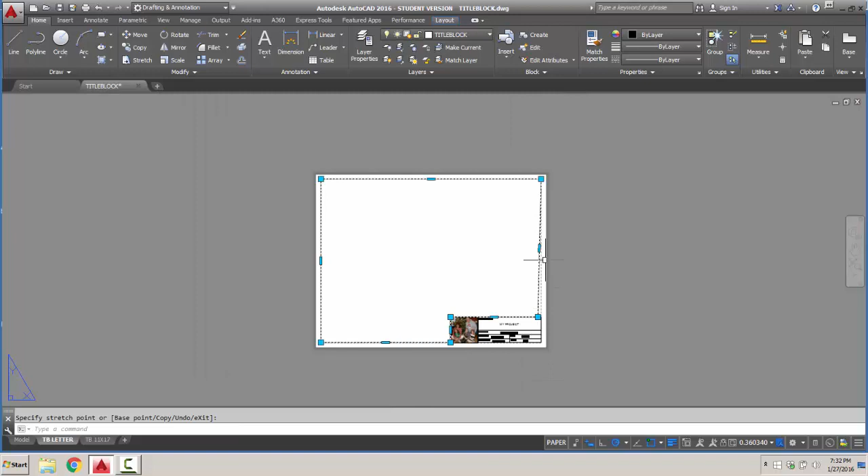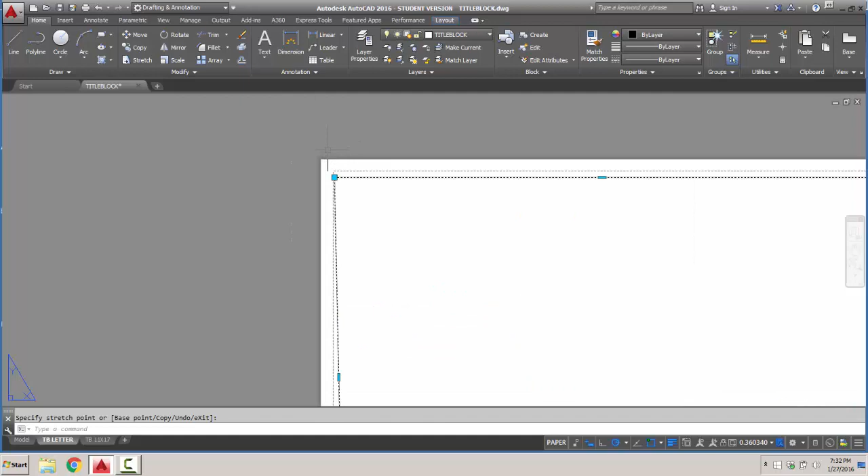What I want to do is actually just change this view window just a little bit, bringing it in a little from the border so it doesn't bleed off too much. You can just pull these handles down. You'll notice when I pull this one down, it tells me when I'm level. And we'll pull this one in, and pull it up from the bottom just a little bit.

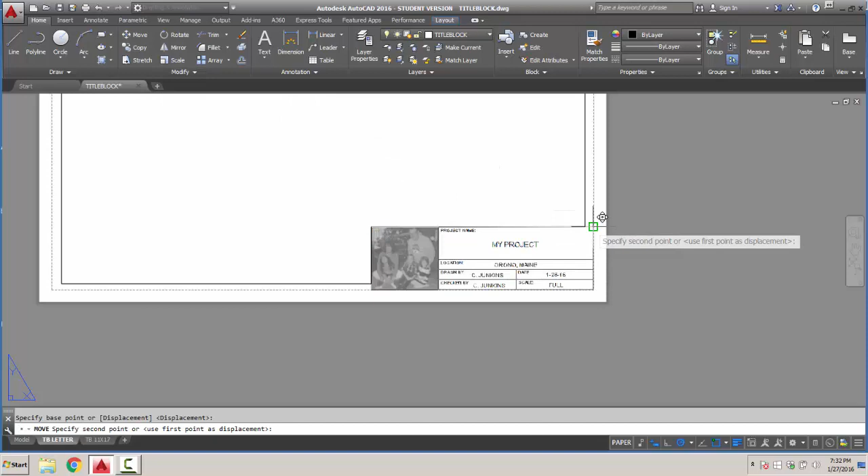Hit escape. I'm going to take my title block and move it, using the move tool. Just grab it by this top corner, bring it here, and then we'll bring it up to here. And we can just grab our handles and reposition it around, just making sure our border will fit.

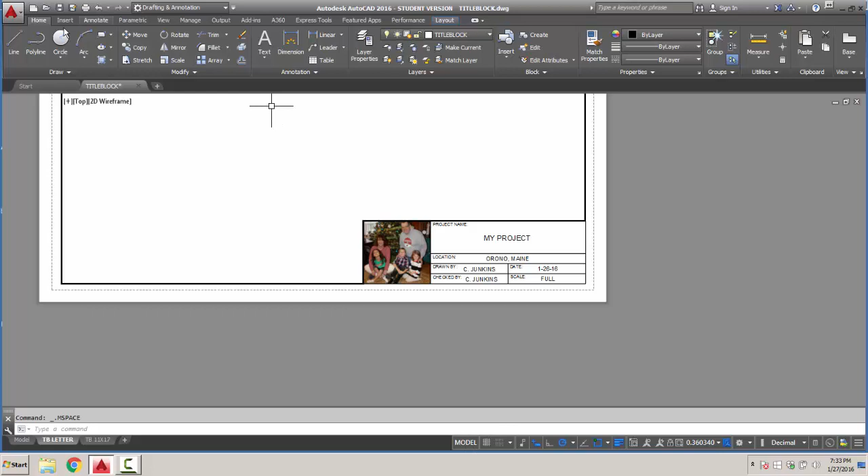Now I'm going to go to the model mode, and I just want to take my line tool and trace a line around here. Actually, I think I may have to do this in paper mode, sorry. There we go. Okay, so that'll give us a border.

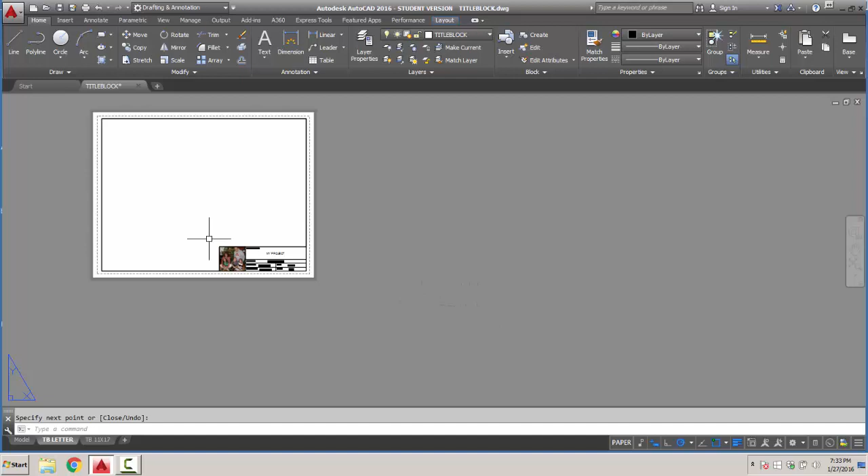Do a file, save, and then we'll close this out. And we'll open up our good old-fashioned plate.

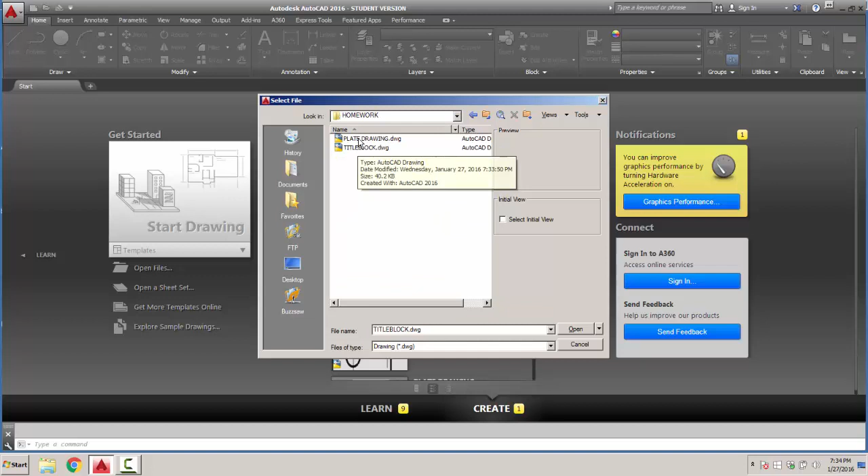I'm going to use my, I think it's in my desktop home directory, homework, plate drawing. And I should probably, let me just close that. I'm going to bring up another drawing from our lab class so it shows up better what I'm trying to show you.

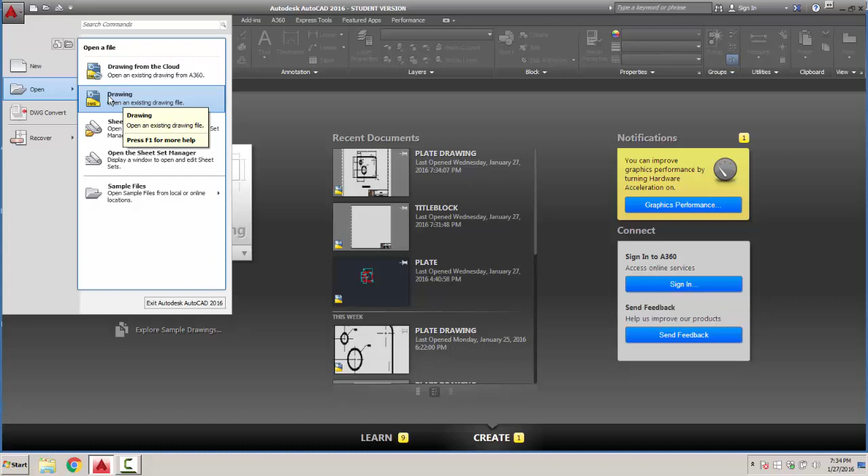So I'll go into lab 1, I'll bring in homework, there's our plate drawing. That one looks a little better. I'm just going to do a file, save as, and put this into my home directory so it doesn't mess anything up for next week. And I'll just overwrite this one. Yes.

Okay, so here's what we're going to do. I'm going to bring in a new tab. Down here at the bottom, I'm going to take Layout 2, right click, and delete it. And I'm going to right click on Layout 1 and say From Template.

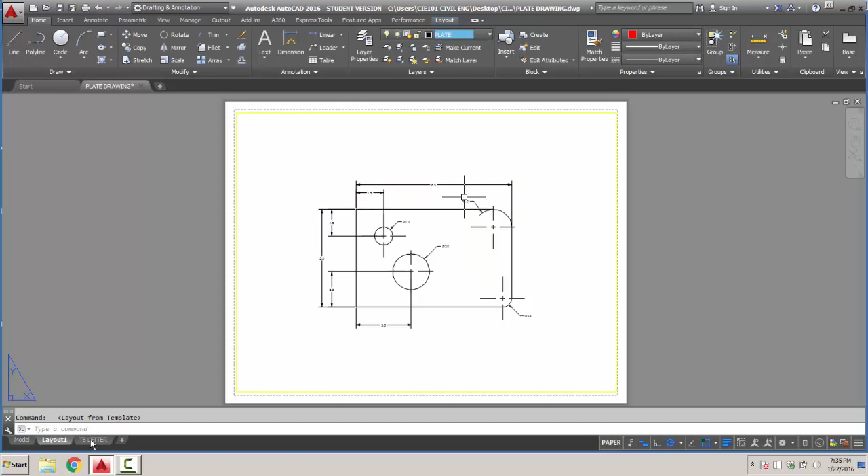I'm going to bring in my title block, make sure it's the one from home. Yep, title block, open. And I want the one that says letter. Just say OK. What you'll notice now is I have a letter title block down here. If I just right click on this, I can see it. If I double click in here, it brings it to the middle. Go to model, double click, and there's my model.

What we're going to do now is drop this down to half scale. Go to model, 1 to 2.

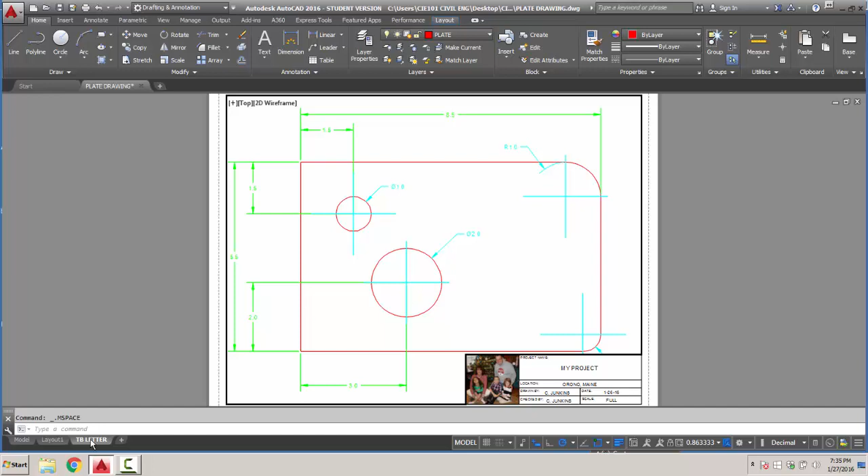And while we're in the model, we'll go ahead and set our line weights for our output. So you're going to go to your layer properties.

We're going to say on our center mark, pull this down. We want it to be a center line. I may have to change that, but we want it to be dark gray. Okay, and see those changed.

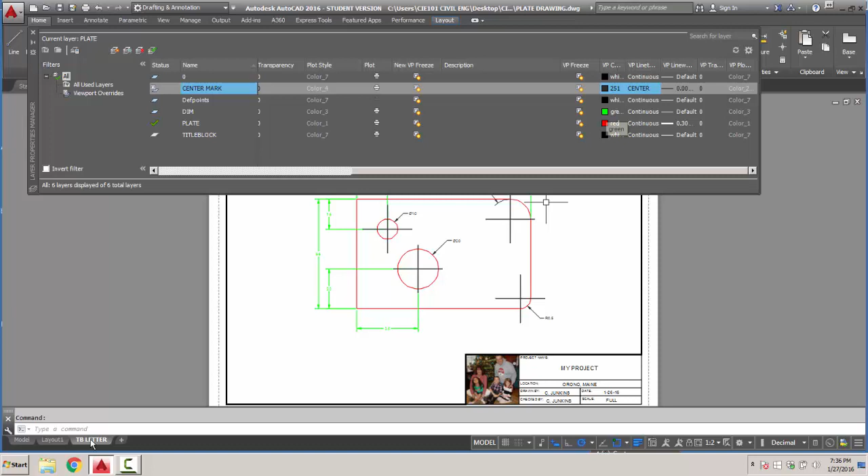And the green we want to be black, and the red we want to be black. My line weight I want to print out at 0.5 millimeters. My dimensions I want to print out at 0.2 millimeters. My center marks are going to print out at 0.13 millimeters.

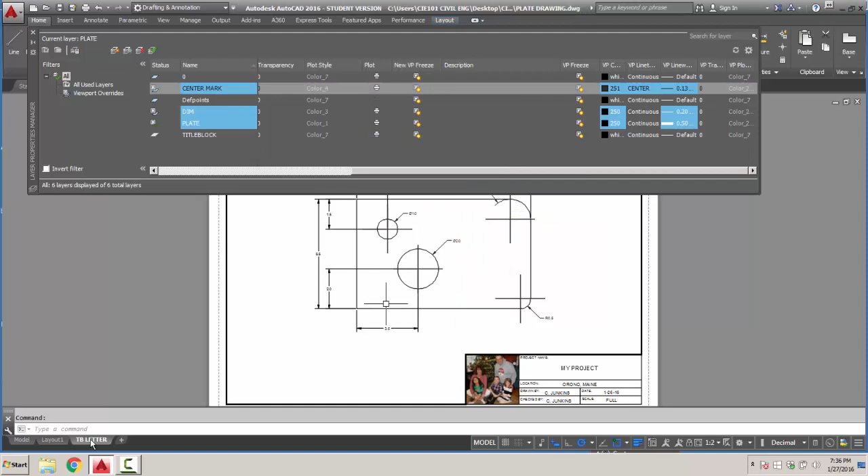And we'll close that out. I'm going to select each one of these. We're going to change it to center mark.

Huh. Still having trouble getting these lines to show up, so keep dropping the scale out of it. Let me just make sure I've got some things correct here on my model.

I'm going to type PSLT scale, should be set to 0, and LT scale is set to 1.

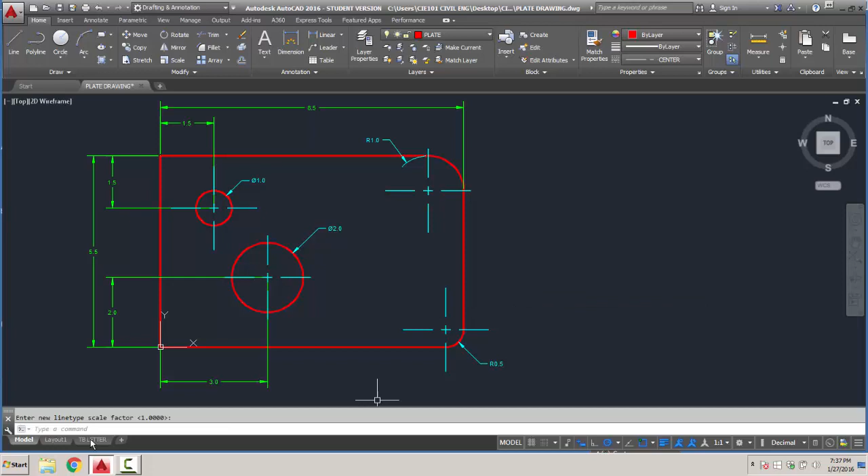Let's go back over here to our title block letter. Let me just see if I can change it to center. You know what I think is I've got duplicate center marks on here, that's what happened.

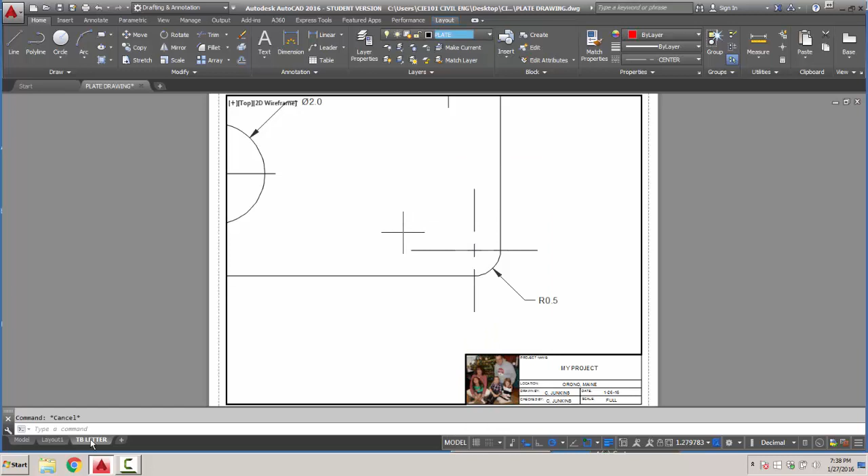That was... oops, don't want that one. There. That's what was causing the problem.

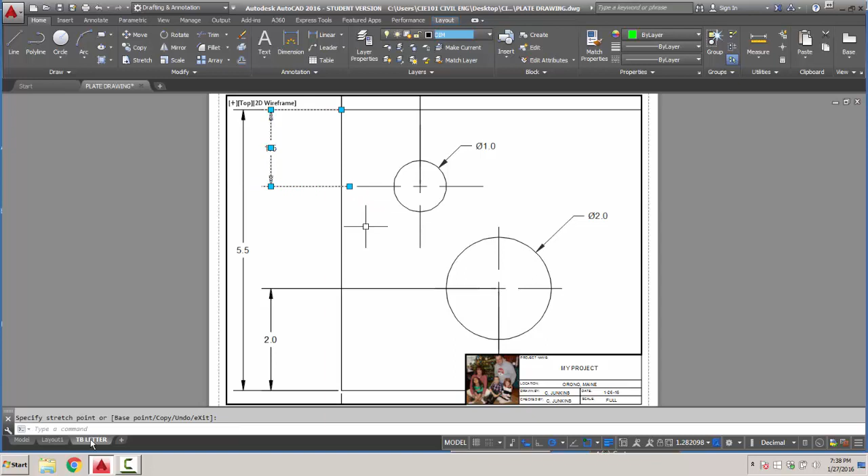Much better. And I'm going to grab these dimension lines. I'm just going to bring these out so they leave a gap, just to make it look better.

Hit escape, grab this one. I'm just pulling it off the center mark and pulling it up so it leaves that little gap. It just looks nicer if you can leave those out of the way. Not being too fancy about it, but good.

And these will kind of stay lined up anyway for you. Just gotta be careful with the mouse. Much better. Now let's change this to 1 to 2.

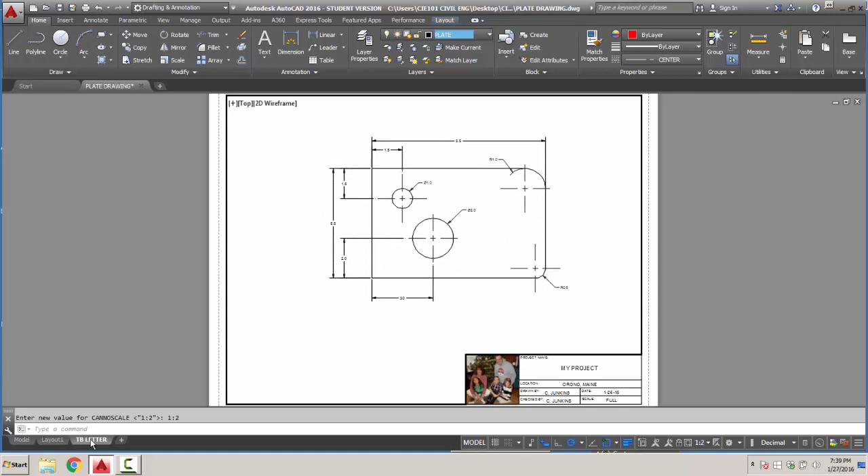Move it into place. We're going to go check our layer properties one more time. Bada bing, bada bing, looks good.

Close this out. Now we'll go to paper space, or paper mode. I'm going to double click on this title block. It's going to bring up...

So my project name is going to be, all caps, PLATE DRAWING. And we'll leave the location, drawn by, checked by, call it 127.

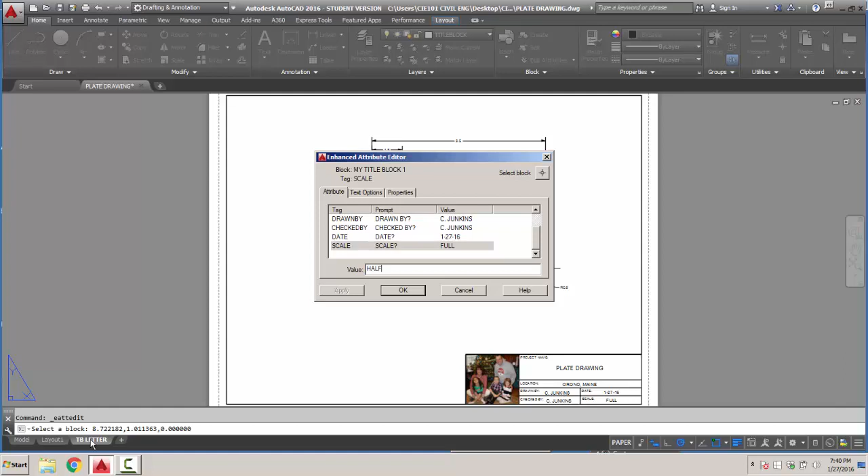And this is not full scale, it's going to be half scale. All right, so we can zoom in. There's what our line weights will look like. Got our image... oh, it's nasty.

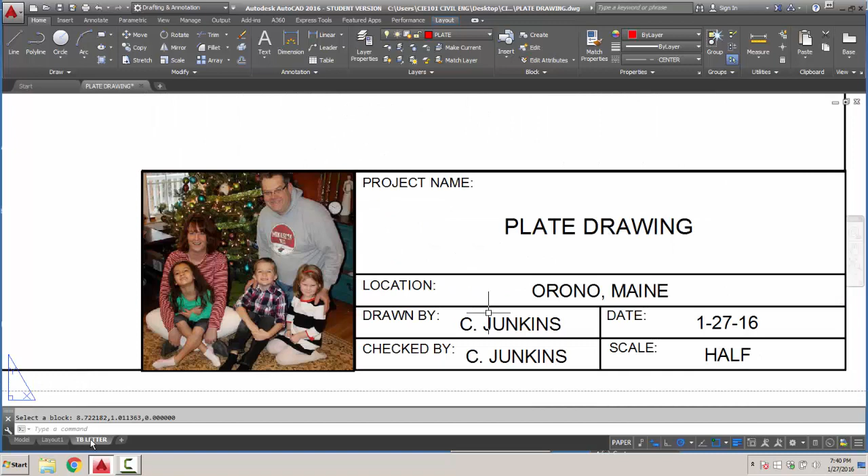Okay, so anyway, what we'll do now is right click down here in this tab, and we're going to say plot. Yes, we just want to plot a single sheet. We're going to change this to Adobe PDF.PC3, which I think everybody should have on their machines. Letter size, and I want to preview it.

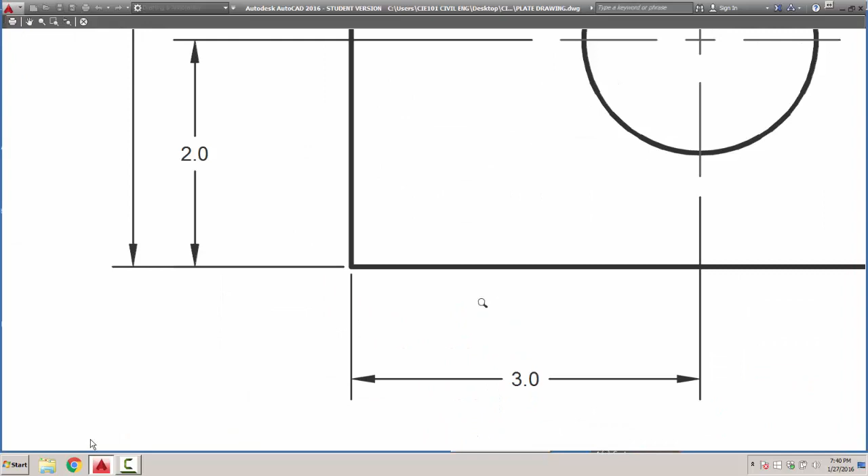There it is, and I can zoom in, see that my line weights look good. That all looks good down here. And maybe one final little touch here.

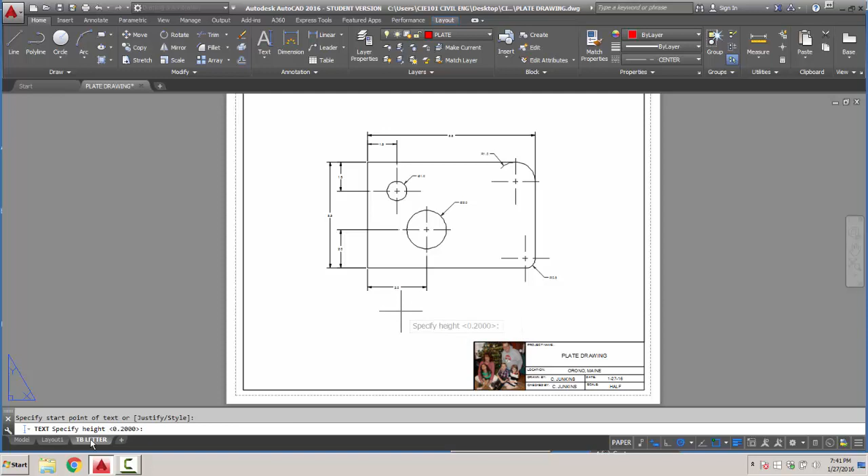I'm going to cancel this out. I'm just going to recenter this a little bit more, and we'll put some text on the bottom, just some single line text. Hit enter, enter again. I'm going to call it plate top view. Whoops, didn't mean to do that. Plate top view. Hit escape.

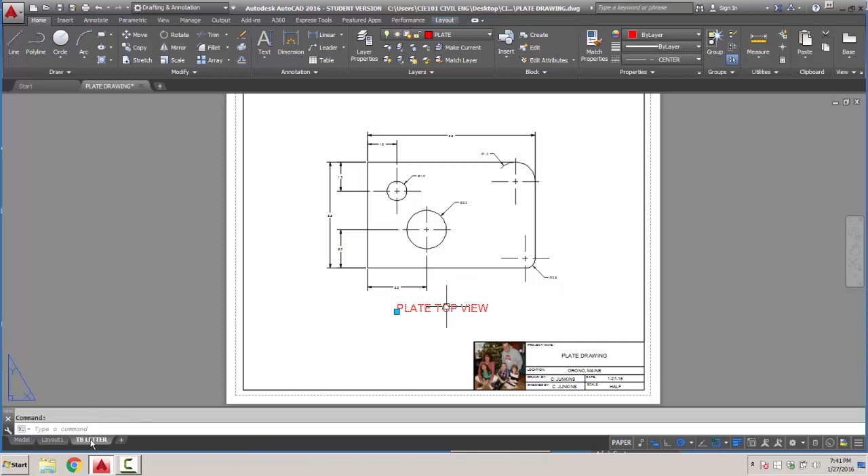Now I'm going to select this, right click and go to properties. I want this to be in the title block level, in black, by layer, and let's make it a little smaller, say 0.15. That looks a little more professional. And if we want to move it over to the center, looks a little better.

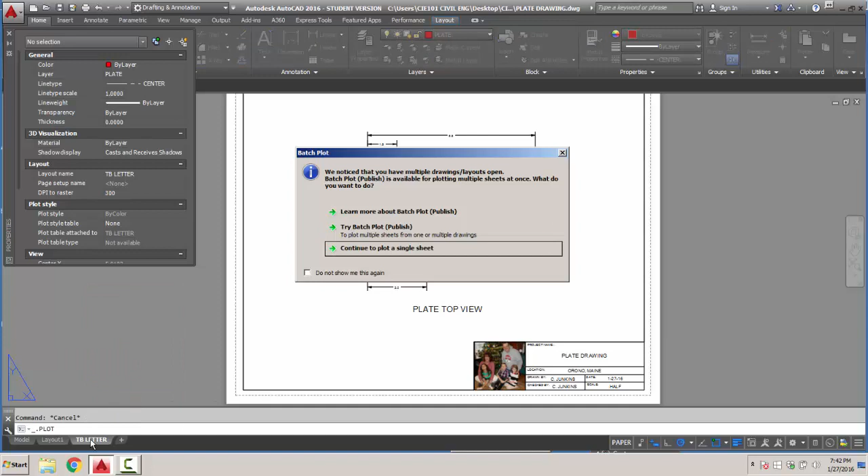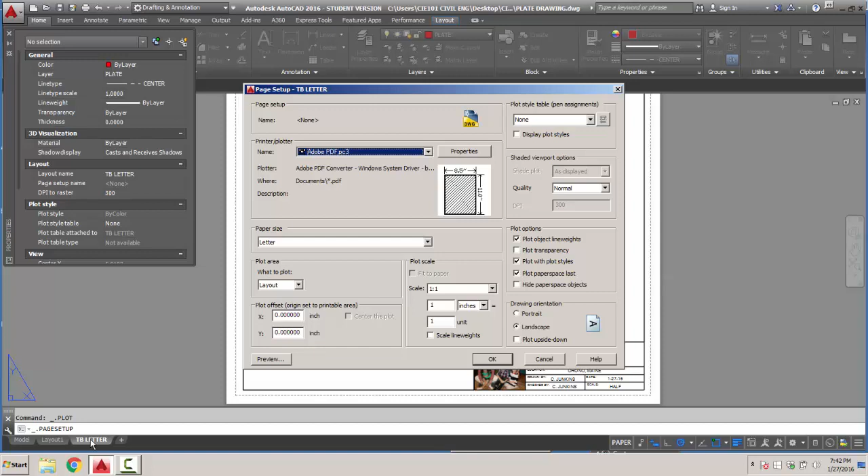And we'll right click, we'll say plot, continue, single sheet. We want to again set it up for Adobe PDF PC3. If we don't want to keep messing with that, you can come down here, right click, and say Page Setup Manager, Modify. You can always say whenever I'm in this page, I want it to print to Adobe PDF.pc3, no pen tables or anything. And transparency, we'll click that off. Okay, close. Now when we do a right click and a plot, it'll always come up to that.

We'll do a preview, look it over good, make sure everything is in proper shape, and we hit plot. It's going to ask us where we want to put it, and I'm going to put it in my CIE 101 home PDF folder that I created.

Call it assignment... let's call it plate proj C Junkins. Save. So now we can just do a file save here, just to make sure it's saved, close it out.

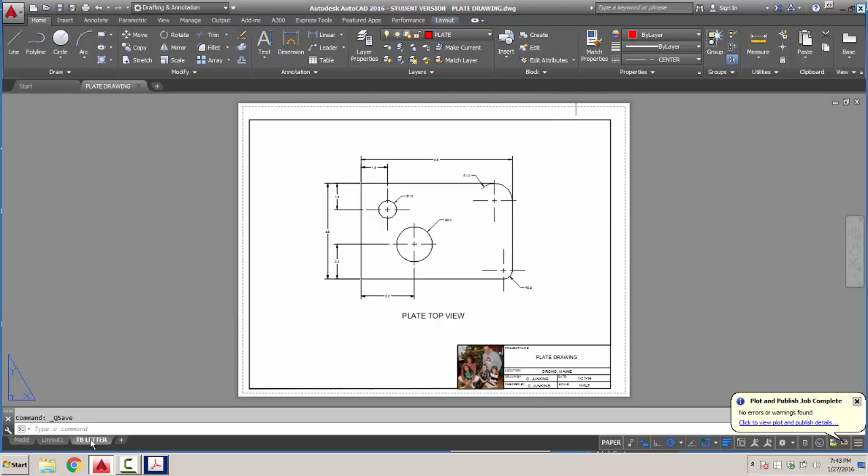Here's our drawing file now, and you can see it's much different. The PC3 kind of made it black and white anyway, so I'm going to go to Tools. You may not be able to do this because I have Adobe Professional. Counterclockwise 90 degrees.

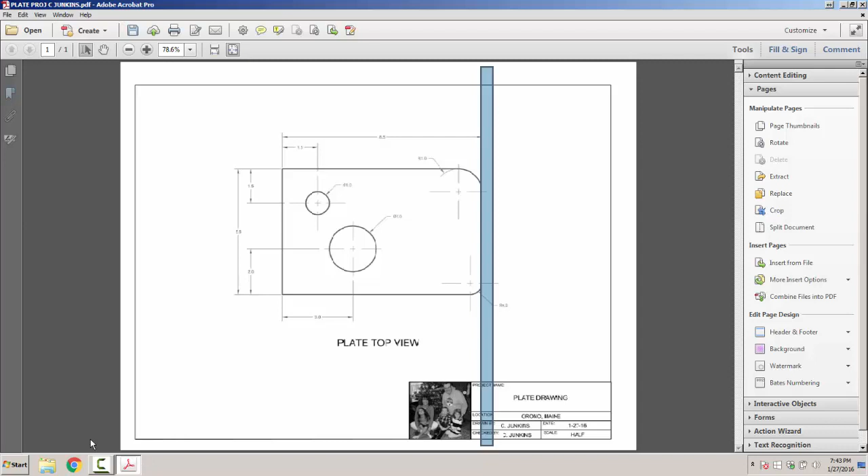Oh, what happened? Missing the line, that's weird. Alright, no, I don't want to save that, it's wrong. Let's go see what happened. It looked right on the preview, I think.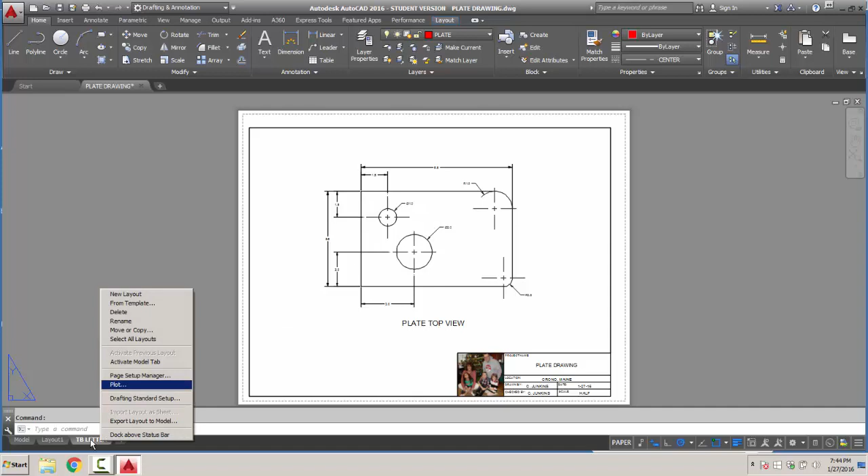So let's open up that plate drawing again. That looked good. We'll right click, say let's go to our page setup manager and take a look at this. It has a bunch of PDF files. Let's just try this one and see what that preview looks like.

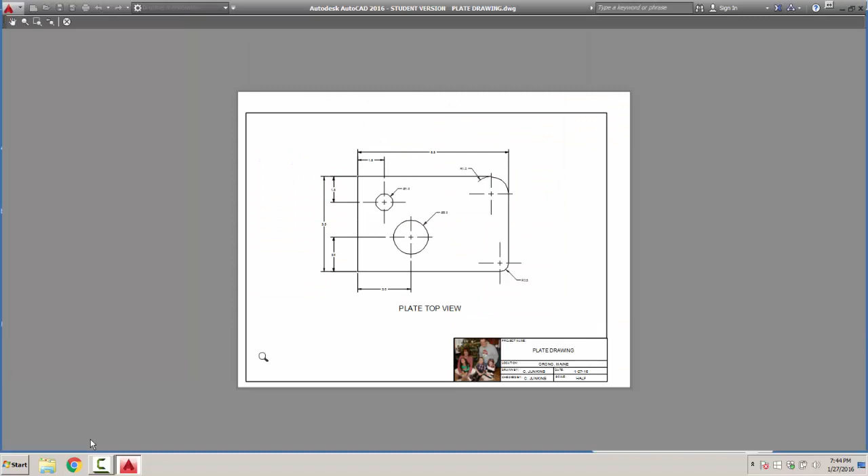Now that one looks fine. The line weights look good, it looks good down here. It's DWG to PDF.PC3. All looks good.

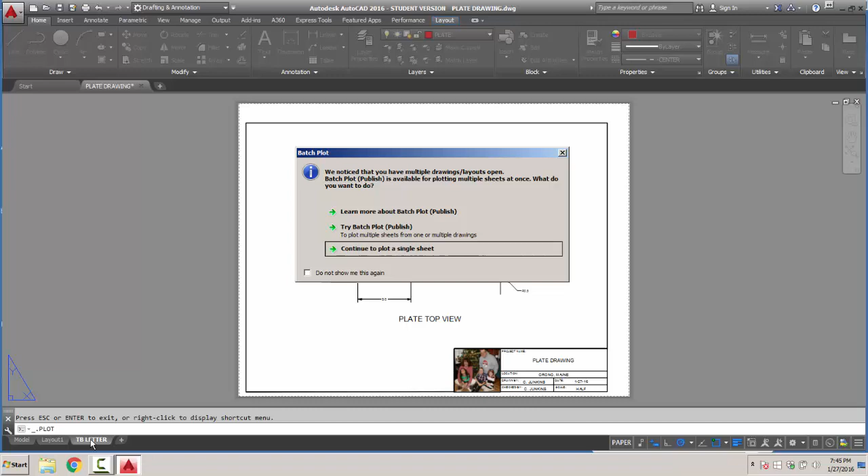We'll say OK, close. Now I'll come down here and do a plot, continue to plot, preview it one more time. Still looks good, print. And this is going into desktop, CIE 101 home, PDFs. I'll overwrite that one and hit save. Yes.

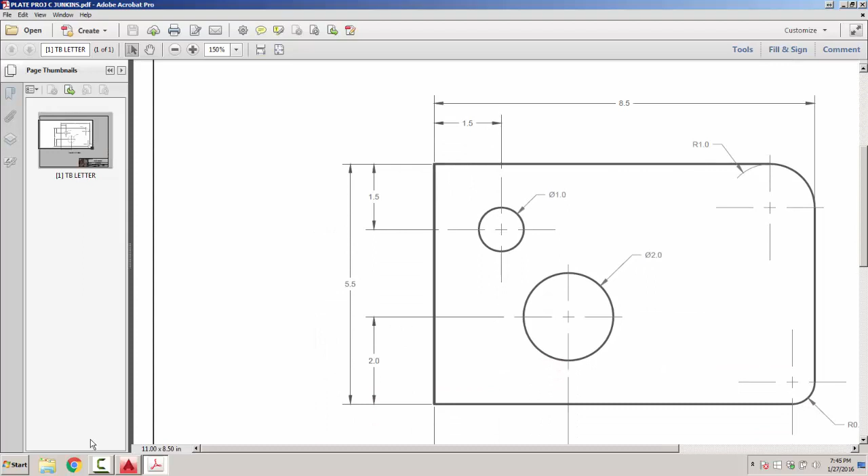Yeah, it looks fine there. A little mishap, so I used the DWG to PDF file. We'll zoom in, take a look, everything looks pretty good. You can see the line weight actually gets much finer here. For some reason this one came out in color too, so I'm not sure what happened on that previous one.

Do a fit view, we'll just do a file save. That's actually already saved, so we just need to exit. We'll close out of this now, and yes, save it.